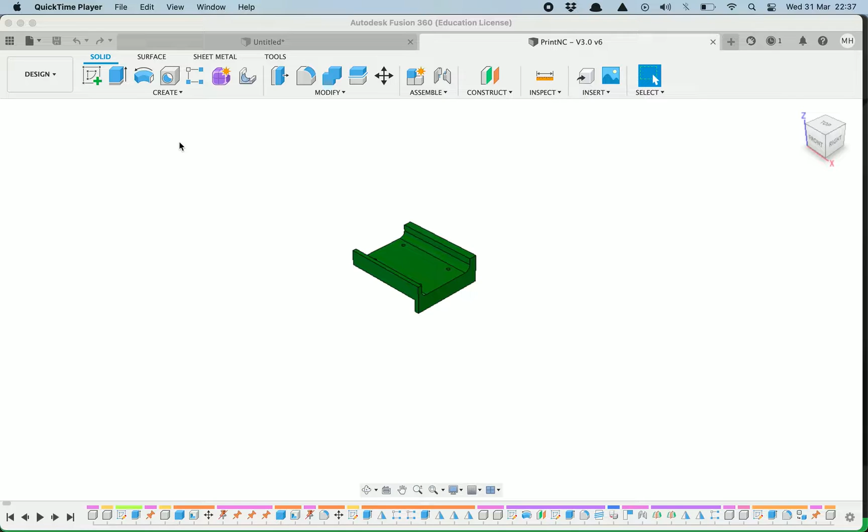Alright, so I've already got the PrintNC file open here. This is just a real quick tip. You can see that at the moment all you've got is a single assembly tool.

Why that has happened is the file, when you download it, is just going to reflect whatever I was last working on. So I'll go in there and make very small changes. If I don't go and unisolate everything and return it back to a standard state, you're just going to see it how I saw it when I walked out.

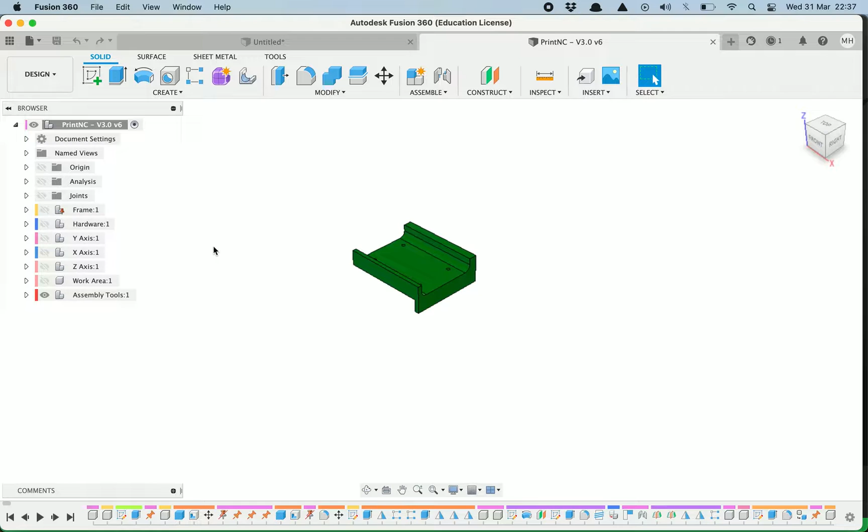So if I turn the assembly tools off, like that, and go right click, unisolate all, you will see—just give it a short moment—you will see that the entire machine is there. It was just hidden from view.

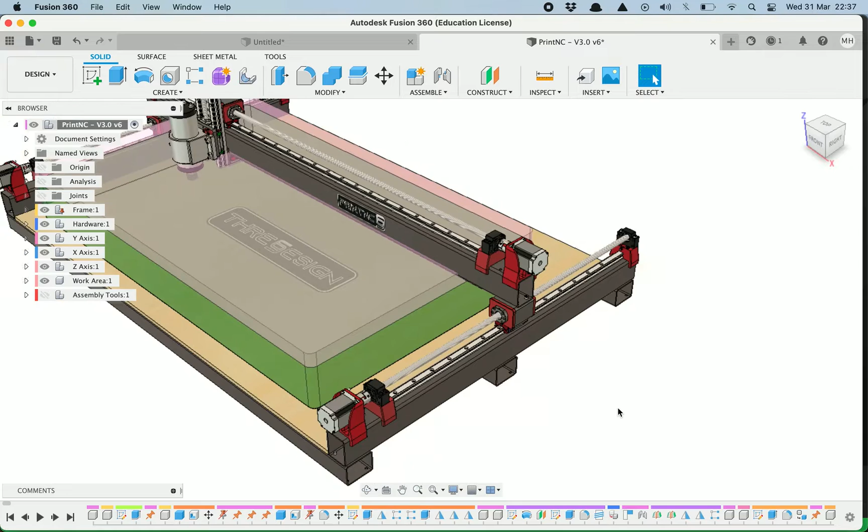Alright, so what we're going to do is we're just going to quickly go up into the parameters. If we go to modify, change parameters, we can see there's a huge list of different parameters available to us. Now, I'm not actually going to change any of these because I don't want to sit here and watch it regenerate. Actually, no, what we'll do, we'll skip that—let's just go back.

Hot tip: if you're going to change your parameters, one of the best ways to do it is to take it all the way back. So down the bottom left here, take this all the way back to the first icon, so that sort of goes back to start. What that allows me to do is change all my parameters in one go.

So what this is doing is taking my timeline all the way back to the start, but the parameters don't get deleted out. So I can change all of these really quickly, and it's not having to recalculate everything. I can go boom, boom, boom, boom, boom. Go 4 mil, alright. So I've just changed that to a 75 by 50 with a 4 mil steel thickness and a 4 mil radius.

Now I'm going to leave the frame X, and you'll see here if we just expand this out a little bit, and I'm just going to bring this one over. Okay, you can see there's some notes here.

Generally, you're going to have it based on your work area, which we've got down here. Up the top here are all your standard sort of basic parameters: steel long, steel short, steel thick. As you go down and scroll further, you get into some of the more complex ones. You've got things like rear mount Z, you can adjust your ball screw length, and you can adjust your bolt pattern for different size NEMA mounts. Everything's adjustable in here, but for 95% of us, what we're going to do is stick to this top 5.

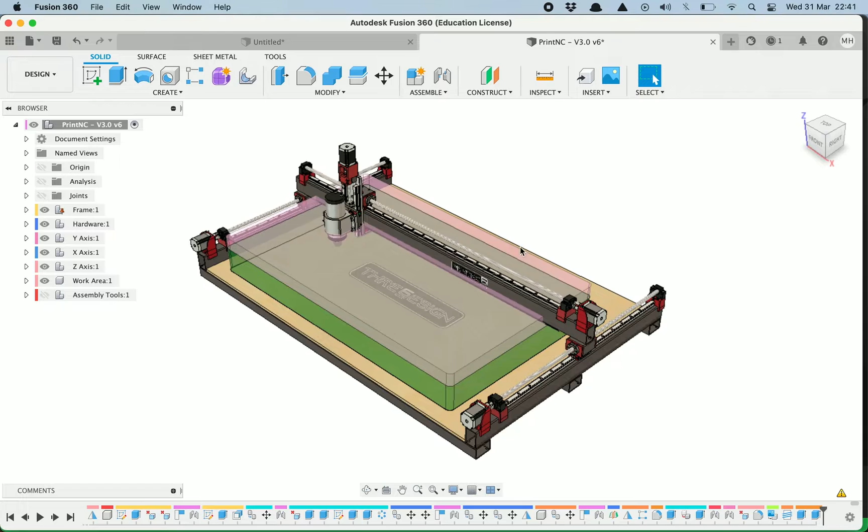Anyway, here's our machine, it's been recreated. Now if I zoom in, let's do a quick zoom and hopefully we can orbit. No, we can't orbit, right, hold on. Let's orbit around here. If I zoom in on what we set and do an inspect, you'll see this has been adjusted to be 75 by 50, because that's what we entered, by 4 mil. Alright, there you go, by 4.

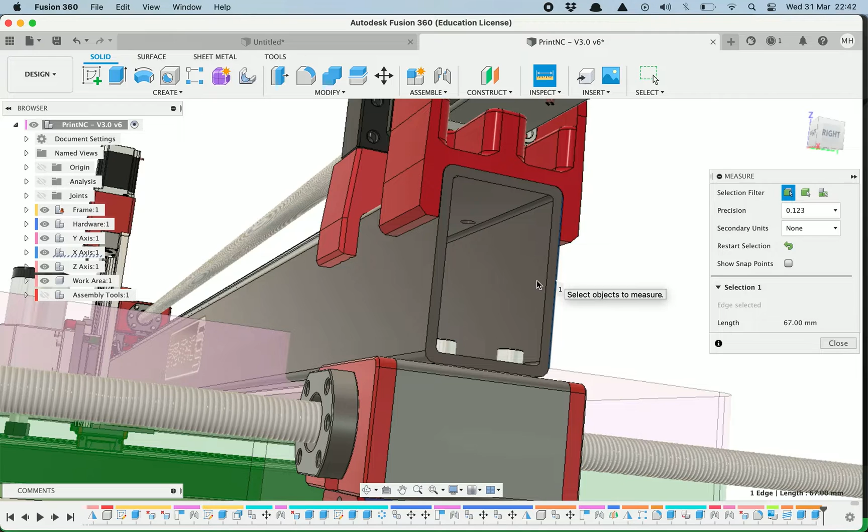Alright, so what we're going to talk about now is how you export these ready for 3D printing. Now they've been adjusted to our size, and there's a few ways we can do this.

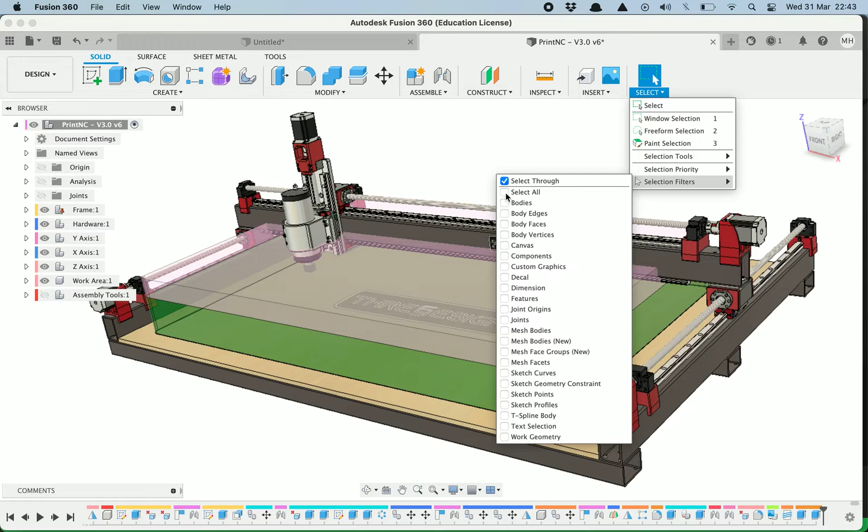I'm going to come back and set up some selection sets in the next day or so which will make that easier. But the easiest way to do this is you go Select, Selection Filters. We went up here to the select window, selection filters, remove, select all, and just go to bodies. The way the color coding works is that anything that's red is 3D printed. So you can right click on a part - up there, that's our Z motor mount - right click on that.

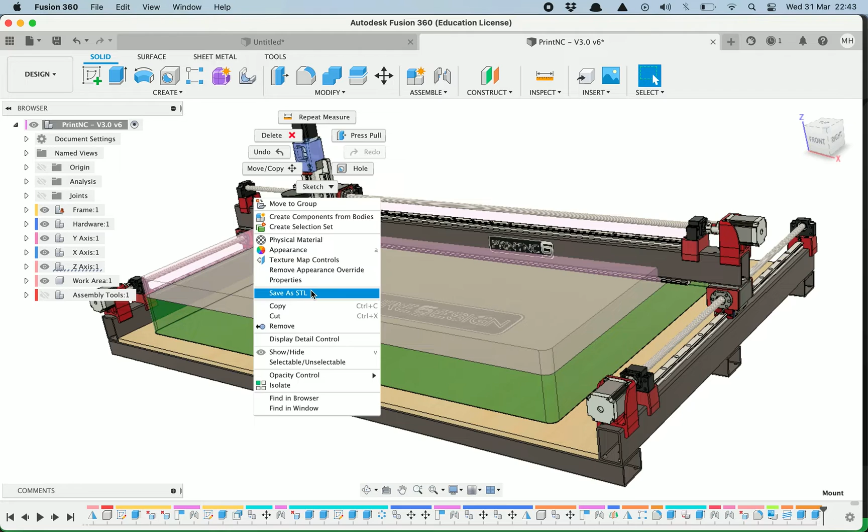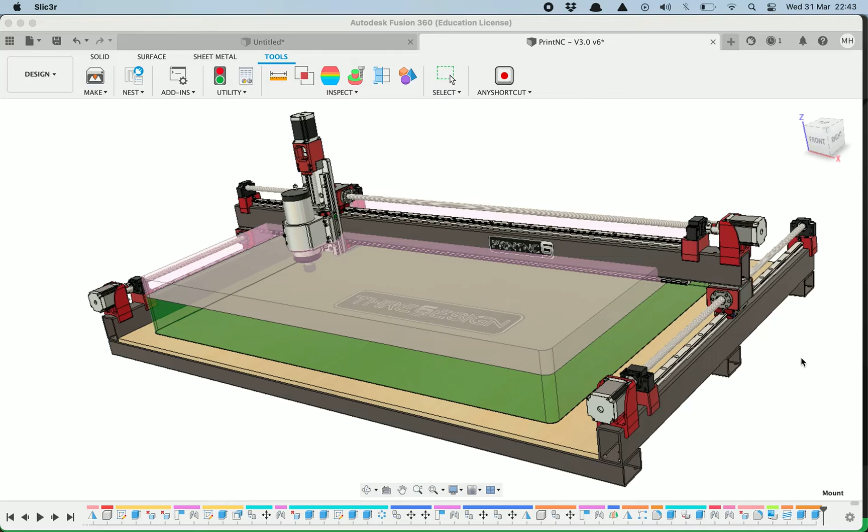Now there's a couple of ways we can do this. We can go Save As STL - saving it as STL will save it as a file. But I also like to just go Tools, Make. Now this is assuming you've got a slicer set up on your computer - I use Slic3r on mine, and I've already got that highlighted. Hit OK and it will come into Slic3r. It's taking it - there you go, it's in Slic3r.

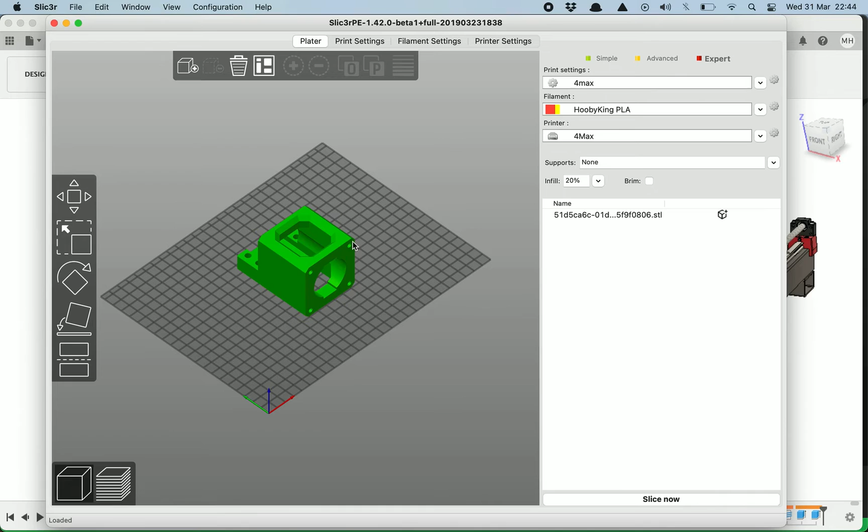So once you've got it like that, you can hit Slice Now. And hopefully by this point I don't need to explain to you how to take it from your slicer and put it into your printer.